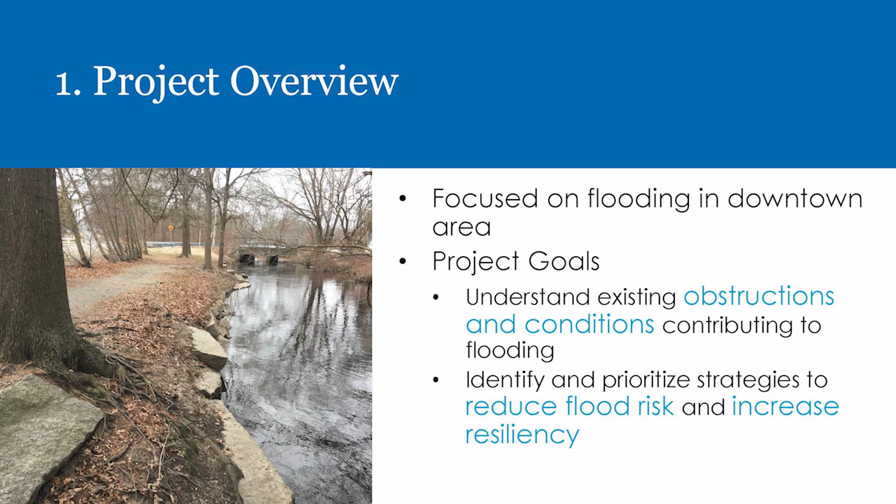Just to start with the project overview — Nick covered this for the most part, but to reiterate our project goals: we wanted to understand the existing conditions of the river, why we're seeing flooding in the places that we are, what the potential causes of that are, and where the key points along the river in this area are to really focus on. Then identify and prioritize strategies that can reduce flood risk into the future and increase that resiliency.

So to start it all off, we need to understand what a floodplain is. The natural river process involves the river channel, which you can see on the left there in blue, and something called a floodplain on either side of that. During normal base flow conditions — dry, sunny days — you have a river with water flowing through it, and it stays within its channel.

As it starts to rain, if we have smaller rain events and the whole drainage area — the watershed — is contributing flow into the river, the water starts to rise. Up to a certain point, it's still going to stay in that channel. But when we get those really big events, in natural conditions the water floods over into a vegetated floodplain. The trees and plants growing there help to slow the water and absorb some of the sediment that might be in it — it's just part of this natural system.

Well, what happens is that people need to live somewhere — we need our work and our businesses and whatnot — and over time, humans move into that floodplain because, again, during normal sunny days it's dry. It seems like a great place. It's fertile soils, all of that.

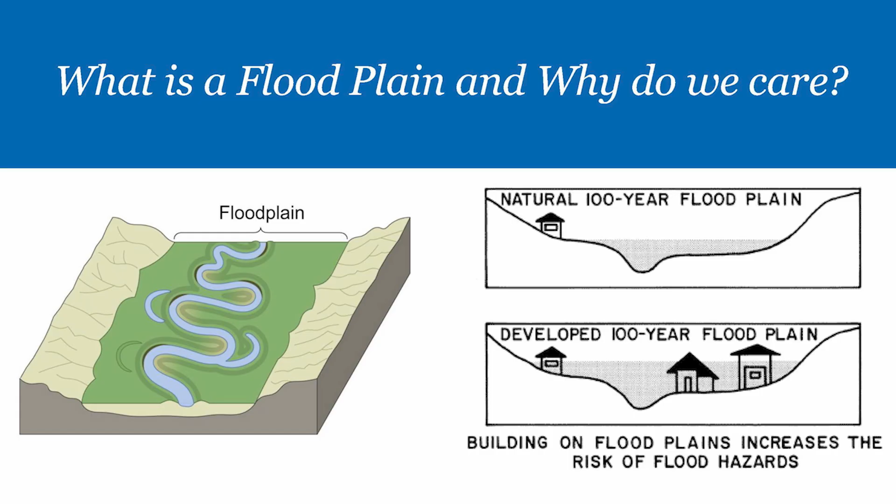But by building in that floodplain, that made those businesses and homes susceptible to flooding. So humans, being humans, we like to try to control things, particularly nature. We tried to build things up, thinking we're going to stop the floodwaters. So you might see walls along the river channel trying to block the flows, or in other cases slow the flows. Over time we end up with a very impacted, urbanized river system, and that can lead to disastrous floods in the floodplains, as we've seen on the news in a variety of places.

Unfortunately it's getting worse and worse as the climate is changing and our storms are coming more intense and more frequently. So that's kind of the background on what we're talking about today when we think about floodplains and flood zones.

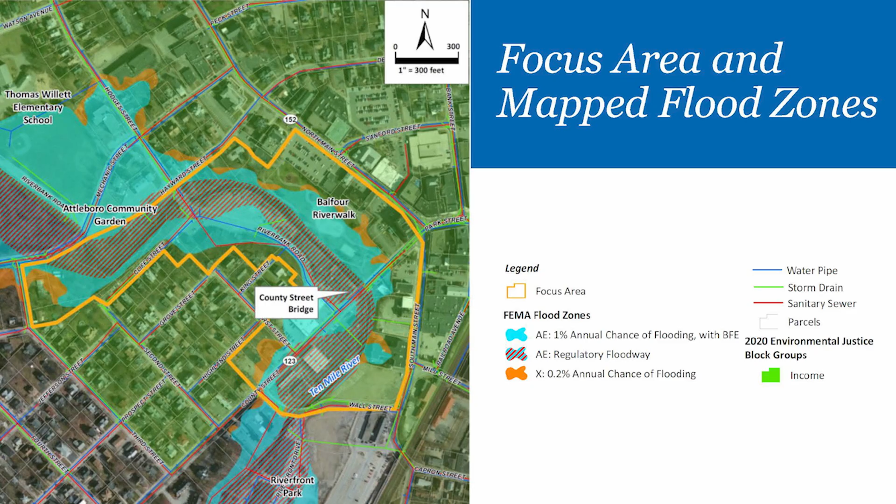And as we've been seeing, that is happening more and more frequently. So we're going to try to refer to it as the 1% chance event to help drive that home, but it's the same thing as what other people would call the 100-year flood event.

So we're really focused on looking at impacts at the County Street Bridge. We know from talking to all of you and looking at our model results, this is a critical point for the city. It's a very important arterial road, and that is where we've experienced a lot of the flooding in recent years. So that has really been where we've focused our efforts.

The project overview for this particular study involved 8 different tasks. At the last meeting we were really focused back on tasks 3 and 4. Since then, that was in May, we have done a lot of technical modeling work and looked at what strategies and measures might help reduce those impacts. So I've highlighted tasks 5 and 6 there.

The next steps after this meeting are that we go into a benefit cost analysis. That's not just a general benefit cost analysis - this is something specific that FEMA requires as part of this grant. Then we develop the flood mitigation and resilience plan that can be guidelines to help the city moving forward. Nothing's going to be built tomorrow, as Nick pointed out - this is just looking at the opportunities and strategies available to the city.

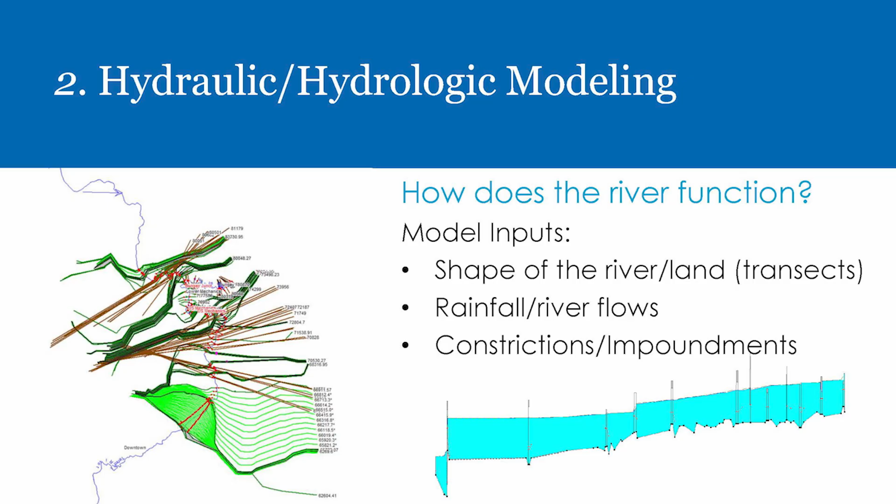What you're seeing there is the river channel through the city, and then all these crazy lines that look like some sort of creature - those are transects.

So that is just how the model knows the shape of the land. If you drew a line, a magic line through down County Street by the river and across, this would show the elevation at each point along that line. We need lots of those transects to understand the shape of the land and how water would flow if it leaves the banks of the river throughout the downtown area.

Some of these were existing that FEMA had in their model. Some of them we went out and surveyed ourselves. We used a lot of different sources for this.

We're looking at rainfall amounts and river flows. There are river gauges at different points in the Ten Mile River that the USGS is measuring flows. We're looking at that, and we're looking at the water department's data on flows. And then we're also looking at constrictions and impoundments.

Having a good understanding of where the pinch points are in the river and where things are backing the water up or impounding it, which could create a whole pond, or in some cases you wouldn't even know it's being impounded behind a structure.

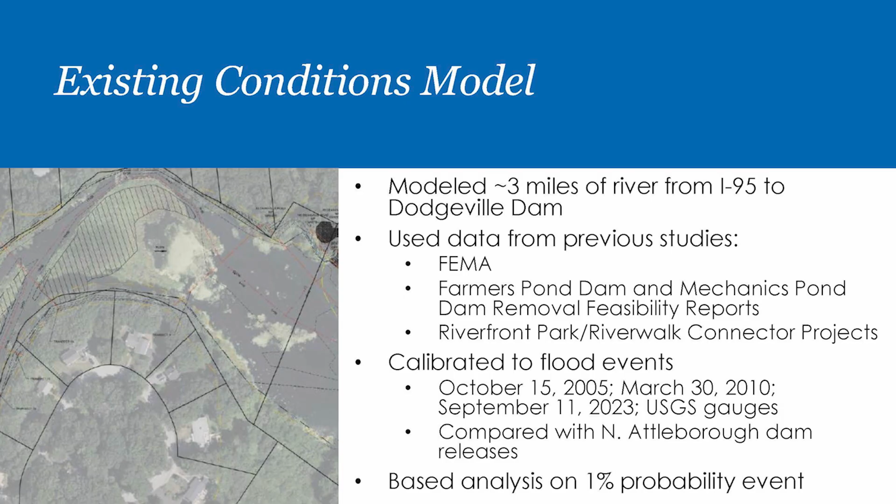And we also thought about the North Attleborough issues. We know that they're obviously upstream from this area, and there are dams up there, and they do sometimes release flows. So we're able to think about when they release flows, how does it compare to the event that we're using for this study? Those releases would be less than what we focused on as our flows. We're looking at that 1% probability event - the really big events that those storms represented, or the 100-year floods.

So the project study point is County Street. I already touched on this a little bit, but just wanted to bring that home - that is a critical arterial road for the city, and of course the businesses around it, but also people trying to get from place to place, emergency vehicles during an emergency flood event. We want to be able to keep this open if possible.

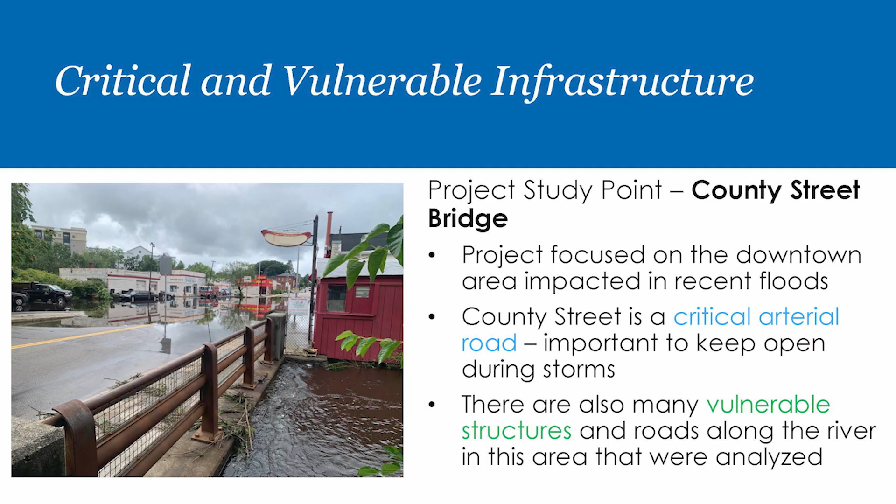But there are many other vulnerable structures and roads along the river that are incorporated into the model. What we're looking for are the most impactful strategies for this particular point. That doesn't mean that some of the other constrictions that we'll present wouldn't be important for localized flooding, but really this study is focused on that point.

So just to go through some of the existing constrictions or bridges that we have in the study area - you can see, I'm sure you're familiar with all of these areas, but Water Street Bridge at the upstream end. This pedestrian bridge, just to clarify, is the Sterling Lofts area. There's a pedestrian bridge there that is not for vehicles to drive across, but that's what that constriction is. There's the Mechanic Street Bridge, County Street Bridge, Wall Street Bridge.

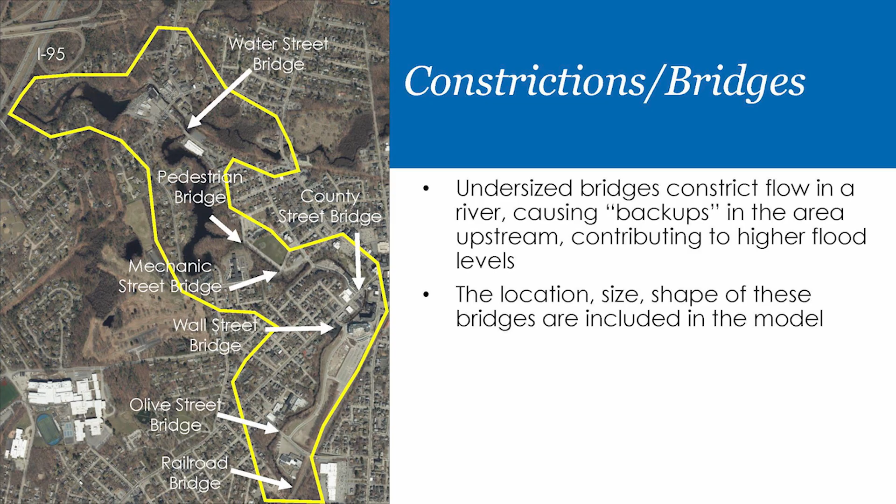We'll get into a little bit more on this, and I think we have boards up as well for each of these.

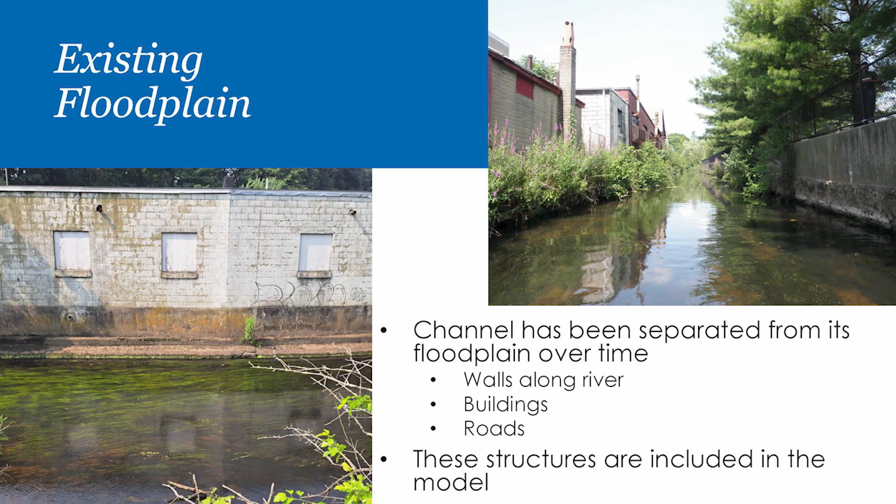And then there's the existing floodplain, just as a reminder, kind of talked about that earlier. We know what a natural floodplain wants to look like, and the existing floodplain has been changed over more than 100 years. The channel has been separated from its floodplain. We've got walls along the river, buildings, and roads. Those structures and the shape of that area are included in the model.

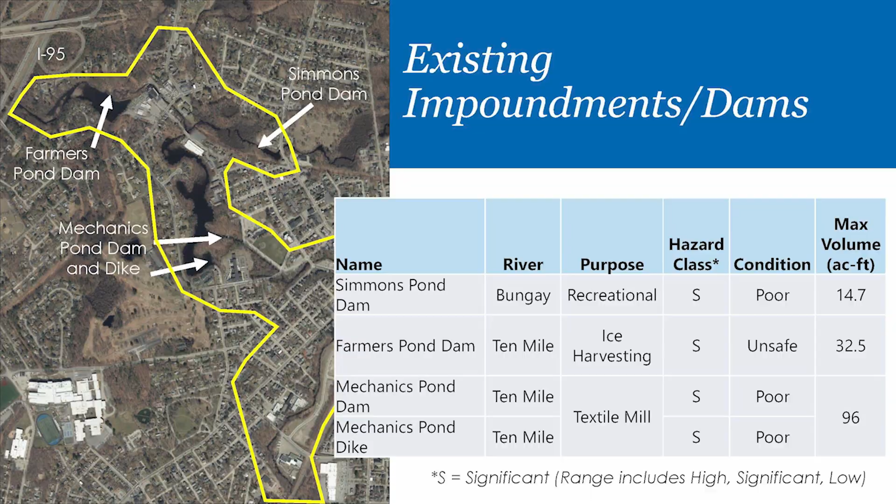We also have existing impoundments caused by dams. We've got Simmons Pond Dam, Farmers Pond Dam, and Mechanics Pond, which actually has two structures, a dam and a dike. To give you a sense of the purposes of these dams originally, Simmons Pond Dam, as far as we know, was created for recreational purposes. We don't have any documentation that it was for industry or anything like that. Farmers Pond Dam originally was created for ice harvesting, and now is mostly recreational for those that live around it. Mechanics Pond was definitely created to help support a textile mill in that area, actually where Sterling Lofts is today. So those were the original purposes for the dams.

The Office of Dam Safety determines a hazard class for dams, and all of these are considered significant hazard dams, meaning that if something happened to them, they could cause significant damage and threat to safety downstream. The condition is determined by various inspections that have to be done on the dams, and our best account of recent condition is that most of these are in poor condition, and Farmers Pond recently was determined to be unsafe or in unsatisfactory condition.

The max volume being held back by these dams is given in acre feet, which isn't maybe the most helpful measure, but you can see that Simmons Pond has a really small impoundment behind it. Farmers Pond is a little different, a bit bigger, more than twice the size of Simmons, and then Mechanics is quite large at almost 100 acre feet of storage water being held behind the dam.

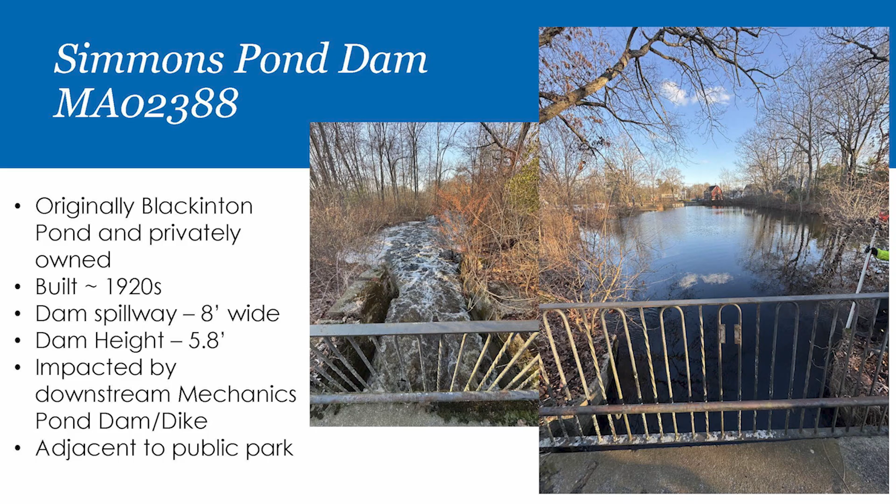All right, a little bit more on each one. Simmons Pond was originally Blackinton Pond and was privately owned. It is now city-owned, built somewhere in the 1920s — I couldn't find an exact date, but it was in that time frame. The dam spillway is pretty small, only 8 feet wide, and the dam height is holding back water about 6 feet high. It's actually impacted by the downstream Mechanics Pond, so when Mechanics Pond is holding back a lot of water, it comes up and impacts the effect of Simmons Pond Dam. It's adjacent to a public park, so people do go and can sit — I think there are picnic tables and benches and that sort of thing at the dam.

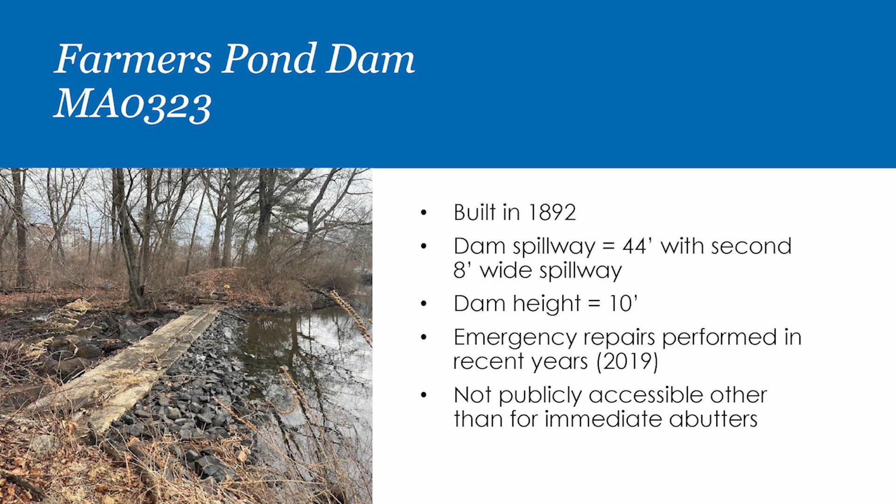Farmers Pond Dam, built in 1892, has a 44-foot spillway, and then a second spillway that's about 8 feet. Its dam height is 10 feet high. It has needed some emergency repairs in recent years — in 2019 it had some problems where it was threatening to fail, and they went in and did emergency repairs there. There's no public access other than for immediate abutters, as far as I could tell.

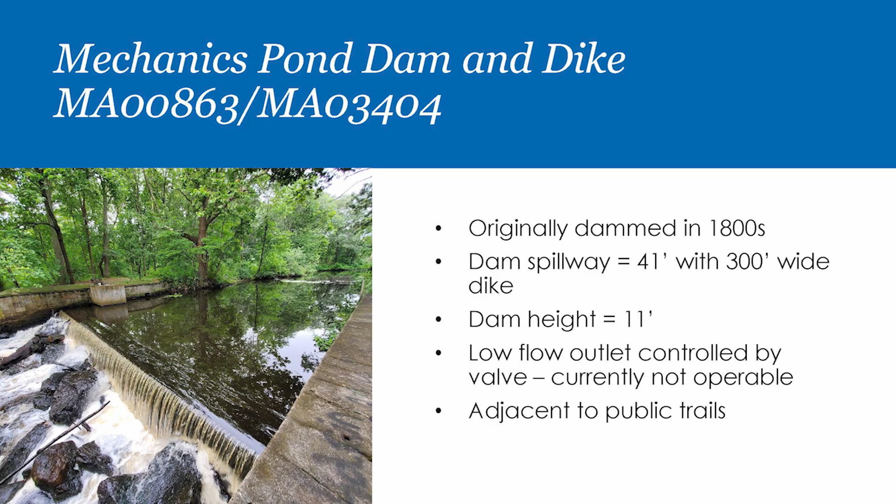And then Mechanics Pond — this was originally dammed in the 1800s. The spillway is 41 feet, and the separate dike is an earthen berm or dike that is 300 feet wide. It has a dam height of 11 feet. It does have a low flow outlet controlled by a valve, but as far as we know, it is not operable at this time, and it is adjacent to public trails.

And then one more thing on the existing conditions of the river system is the sediment. There is some sediment buildup in different places. Sediment buildup, also called sedimentation, can impact habitat in the channel, and it can also reduce channel volumes.

Sedimentation is impacted by sediment sources. So where is all this coming from? Is it coming from the channel itself, or is there some man-made impact that's sending sediment into the river? There's also sediment size—think the difference between a piece of gravel, which is considered sediment, and really fine material like silt or clay, and how that moves through a river system makes a difference in the type of sediment buildup that you see.

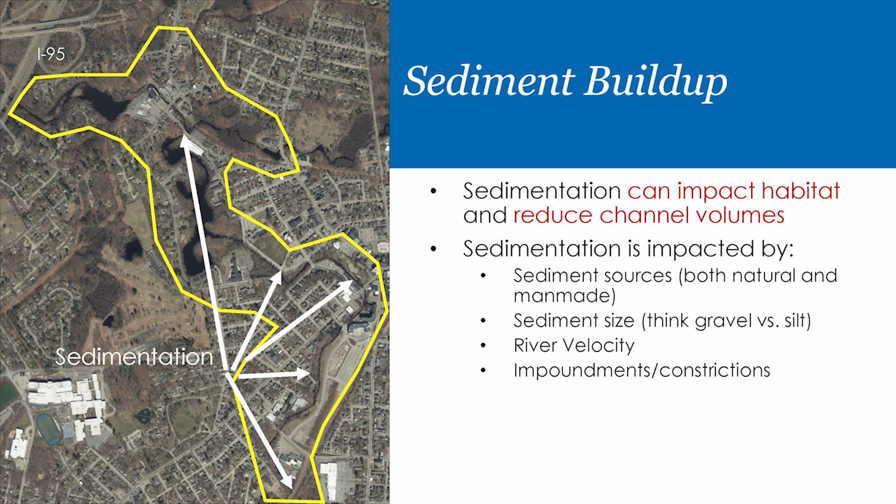River velocity is really important. Where you have a fast-moving river stretch, you're not going to have a lot of sediment buildup. And river velocity is impacted by impoundments or constrictions, so they go kind of hand in hand to where we see sediment buildup.

So with that, I'm going to hand it to Jonas to talk a little bit about what strategies we evaluated.

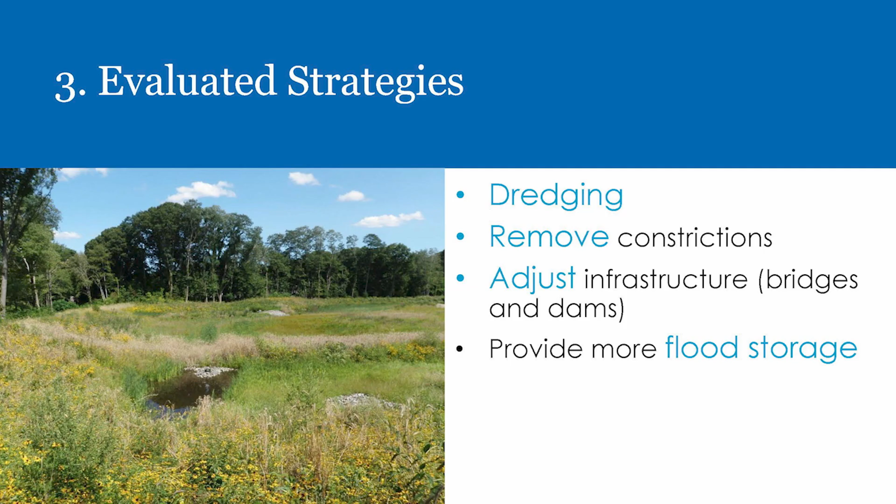Thanks, Michelle. So as part of this project, we were looking to identify all the different possible points along the river that might be causing flooding, causing impoundments, causing the water to build up, and then identifying different individual solutions that we could bring forward and develop as a scenario to reduce flooding along the river, and also see how they worked together, how they interacted with each other to potentially bring about the most reduction in flooding with the best combination of scenarios along the river.

So that included dredging along the river, removal of sediment by machines, removing constrictions—so that could be widening bridges, adjusting infrastructure, widening or raising bridges—as well as removing dams potentially, and any sort of scenario that might provide more flood storage.

So in some cases, widening the banks, especially where maybe a wall has been installed along the river, which is actually blocking the river's access to the floodplain. Is there an opportunity to allow the river to access that floodplain easier, potentially lower the wall, get into the floodplain? So I'll talk a little bit more about each of those.

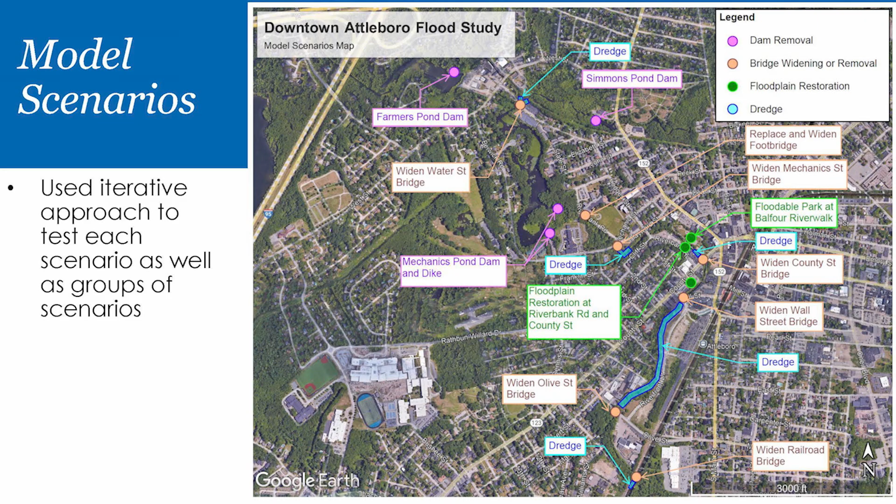And here is a map, and we also have this as a board in the back that we can look at more later if anyone's curious about any of these individual scenarios. We looked at over 10 different scenarios that could help restore the natural river functions and also improve flooding along the river, reduce flooding. So we were looking at each of these scenarios one by one, and then we tried to combine different scenarios to see which could get the most benefit.

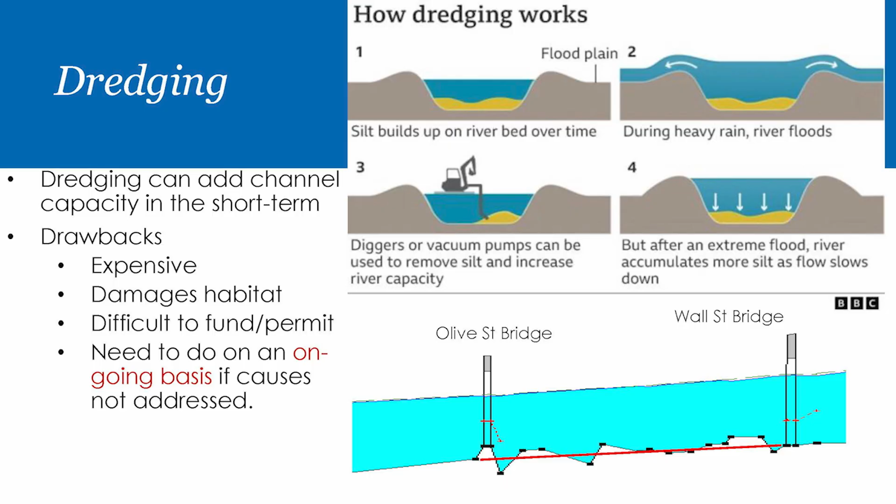In that situation where you have that imaginary line representing a constant slope, I see areas where you could slow water down, creating void volume capacity where it stands out, so you would dredge those areas. Where there's water capacity below the line, would that be filled to create a smooth bottom, or would it remain? That's a good question. Those would probably be allowed to remain as natural lower points, maybe from structures in the river or deeper pockets, especially where a river bends, it tends to get deeper in that area. So you wouldn't be filling in areas, you'd just be removing sediment. Thank you.

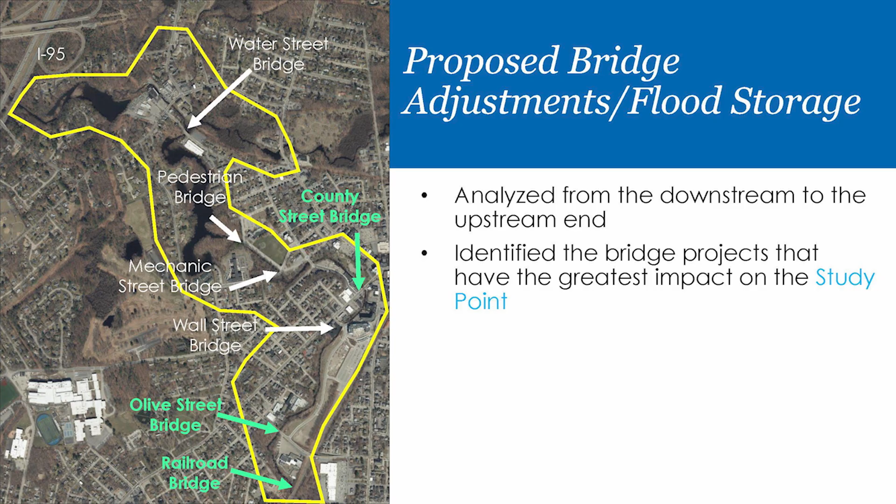So next up, we'll look closer at the bridge adjustment scenarios. We looked starting from the downstream end of the river, working upstream, because typically you get the most benefit upstream from a downstream project. If you free up a pinch point downstream, everything upstream will have a greater ability to flow through it. We looked at each bridge individually, identified certain bridges with the most benefit, and found some that worked considerably better when paired together.

Starting with the railroad bridge, the downstream end of our project area: the existing bridge is a 26-foot wide stone arch bridge. The bankful width, the natural width we estimate the river to be without human interference when not flowing into floodplains, we think would be 45 feet. So this bridge is almost 20 feet narrower than it would naturally be.

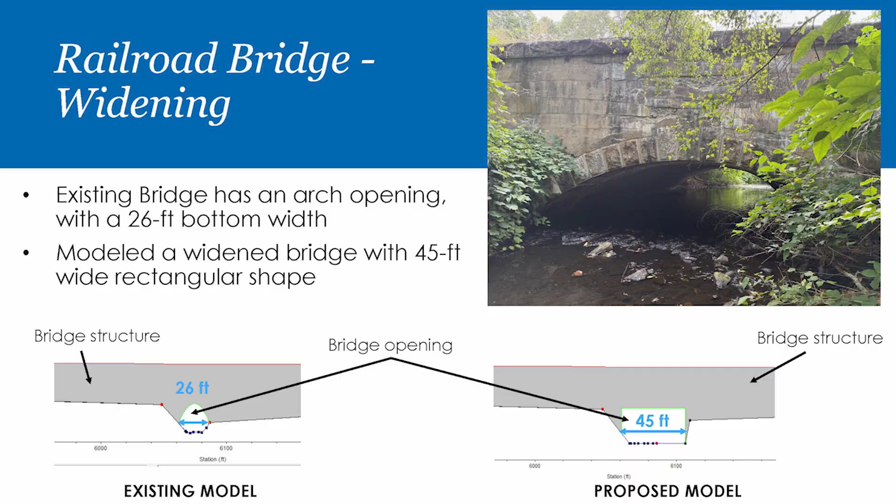So we modeled it having access to a 45-foot wide rectangular bridge. In the model, this shows widening it from 26 feet to this blocky 45-foot wide opening, freeing up space for flow. As a result, velocity in the river picks up because flow can now pass through, and impoundment is reduced. We also modeled sediment transport occurring, with the same results you'd see from dredging also simulated and expected when restoring natural river functions. Restoring the river's natural processes keeps sediment moving, like a natural river system continues to carry sediment along.

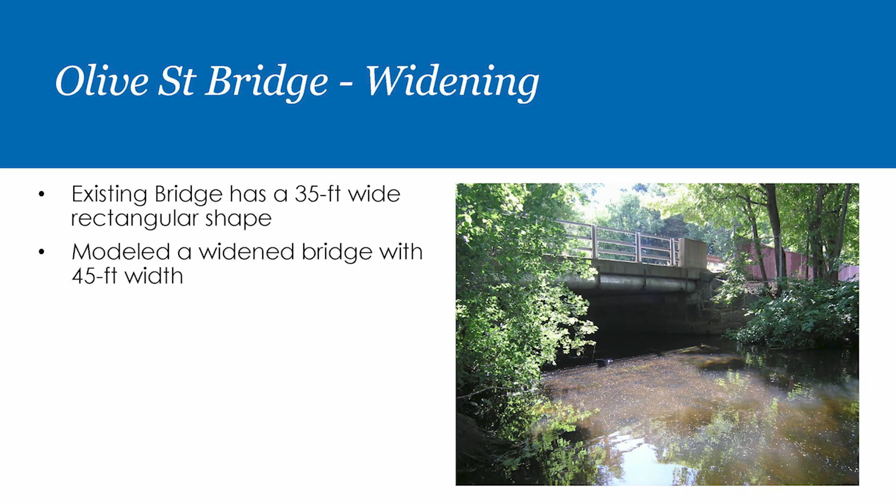The next upstream bridge we found considerable benefit at was Olive Street Bridge, immediately upstream. Again, a natural estimate of river width here would be 45 feet, and the existing bridge is about 10 feet too small. Olive Street and the Railroad Bridge are so close to each other that they interact, impounding water together. So increasing the size of one without the other just shifts the impoundment into the other bridge. We found these bridges work together, giving the most benefit when widening both as part of a larger project.

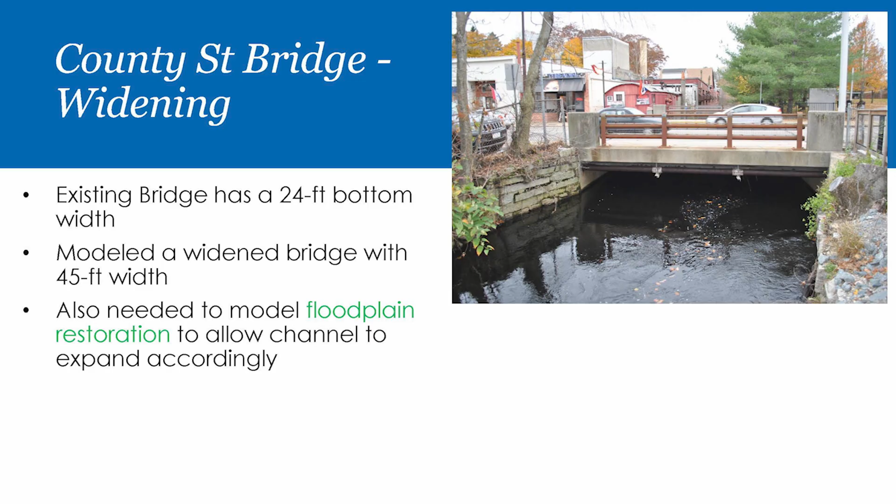The last bridge we identified as having significant benefit, not only for the downtown area but for our specific study point at County Street, is the County Street Bridge itself, which is more than 20 feet narrower than the natural system would be. Upstream of County Street, retaining walls that keep the river in a channel continue to pinch it, so floodplain restoration upstream of County Street Bridge was also included in our scenario. This was the general area we included in our County Street restoration scenario.

Unfortunately, Riverbank Road upstream of County Street is on the low side, whereas the Balfour Riverwalk is a bit higher. So the first place water flows when a flood occurs and County Street backs up is the Riverbank roadside, where there's already buildings and the roadway.

So we looked in our scenario at lowering the wall on the Balfour Riverwalk side, making a floodable park - a park that most of the time is totally above water. People are able to play in it, and then in the rare flood event, maybe once a year or once every 2 years, water is able to flow into the park. It doesn't damage the park, it would be built in a way that it stays in place and is stable, but it creates this new flood storage capacity. It's almost like a release valve before water can even get to the Riverbank Road area. This created another large benefit for the County Street artery specifically.

Got a question for you. You're going to make that a floodable park - are you going to lower the park then? Because that park is right now 2.5 feet above the water line, or even above Riverbank Road. So you're suggesting lowering the park?

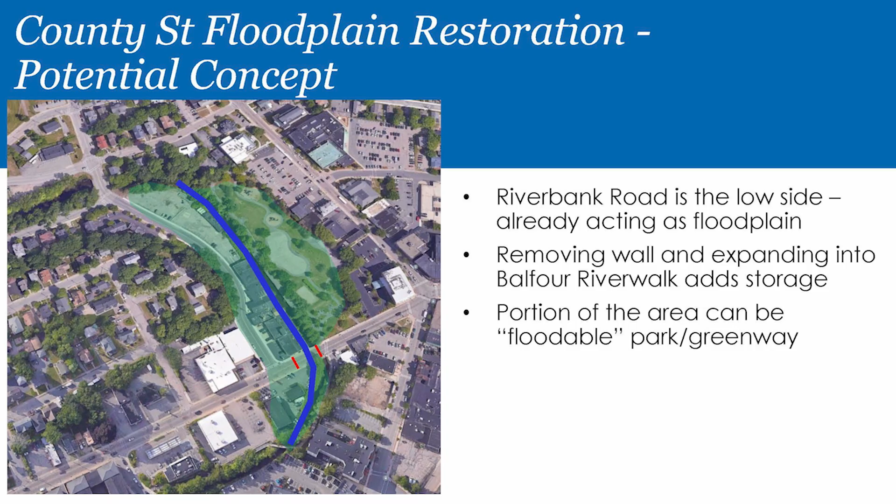Okay, yeah, right there. There are houses on the Hayward Street side that flood now, they're in the floodplain. I own a house further up, not on the floodplain, but my house flooded in 2010. I watched the grates going up and down on the street with the water.

What is that widening going to do to those backyards now? Are they going to get more flooding? Well, the hope by creating more flood storage downstream is that it lowers the water elevation in this whole area. It creates flood storage, so rather than rising up because of these narrow channels, it can expand out. That would lower the water levels, especially upstream of this point, and hopefully prevent that flooding.

That's a very good question. The hope with a lot of these restoration scenarios is that opening up the bridges is not going to cause more water to flow through. It's freeing up a pinch point that's raising water levels. At a certain point, the bridges raise water levels high enough that the weight of the water pushes it through enough that it increases the flow under the bridge to the same flow it needs to achieve anyway. So the flow coming into the river is the same that leaves the river all the time. Flow in equals flow out. You're not getting more flow, it's just increasing going downstream.

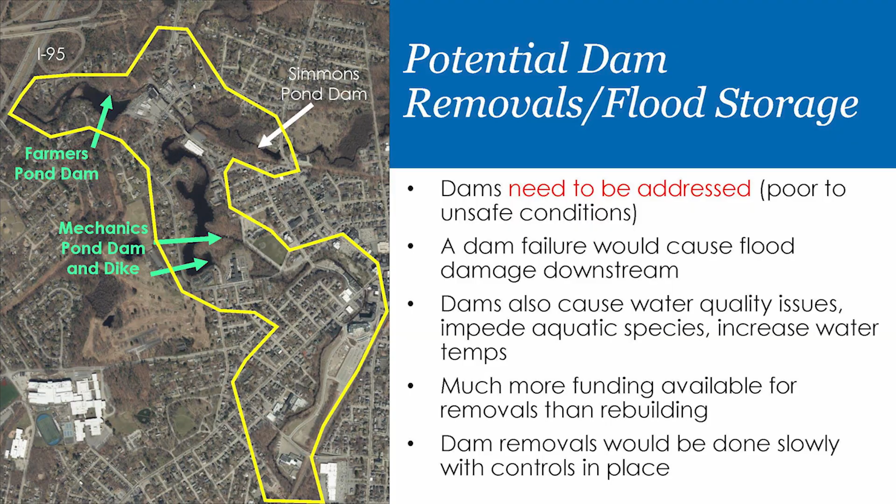Dam failure, if it occurred, would cause not just your typical 100-year or 1% flood coming downstream, but the entire impoundment, those vast acre footages Michelle ran through earlier, all rushing downstream at once. All of these dams being rated as significant hazard dams could involve potential loss of life. So dam removal was a scenario we looked at, not only for potential benefits to everyday flooding, but also preventing a disastrous flood that could come downstream.

Dams themselves cause water quality issues. They trap contaminated sediments or sediments in general, and they heat up water. They slow down the water, so it becomes almost like a parking lot, absorbing the heat of the sun. That reduces water quality in the river and impedes fish passage upstream. So dams worsen water quality on their own.

There is plentiful funding from the state for dam removal, much more so than for a dredging project or rebuilding a dam. There's a lot of funding available for removal, but only a few grants go out every year for rebuilding a dam.

Dam removals occur very slowly. It's not like the failure scenario, it's a very intentional, slow removal of a few inches or a foot at a time to prevent a rush of water downstream. Since 2005, there have been about 40 dam removals in the state, and the rate is accelerating across the state. This restoration strategy is picking up speed and gaining a lot of acceptance.

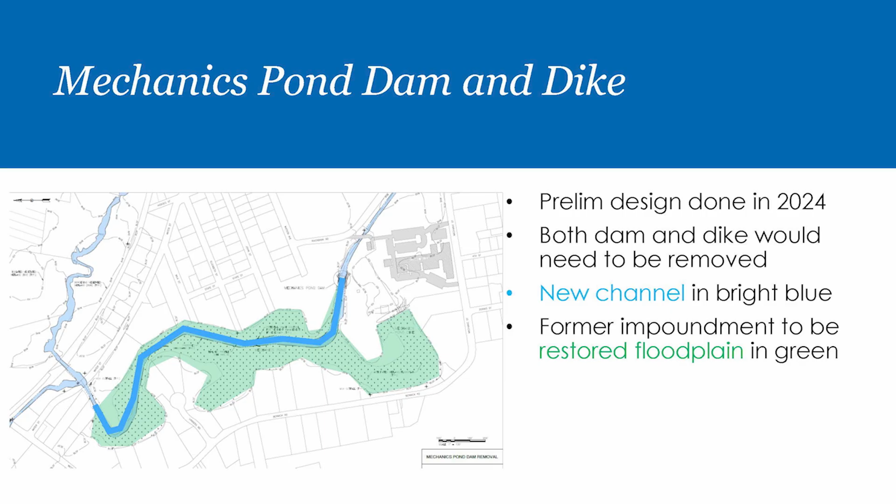So that gives you the sense. I guess we'll be lowering that water surface. It would be easier to picture with landmarks instead of just green in the river. That little projection into the green area, that's above it, so lower is lower, and that subdivision is higher. People are all living up higher, it drops down to the pond currently, then it would drop even further with a floodplain and the channel below. So all of that would be lower.

But I agree with you. Yes, we should have an area on the back of that, which you'll see magically with the next one.

What we did is we took the preliminary design that was done before on separate projects, and showed it here. So that's why they look different.

So here's the preliminary study for Farmers Pond Dam that we performed this spring. Our restoration scenario involved removal of the main portion of the dam as well as the auxiliary spillway to the side.

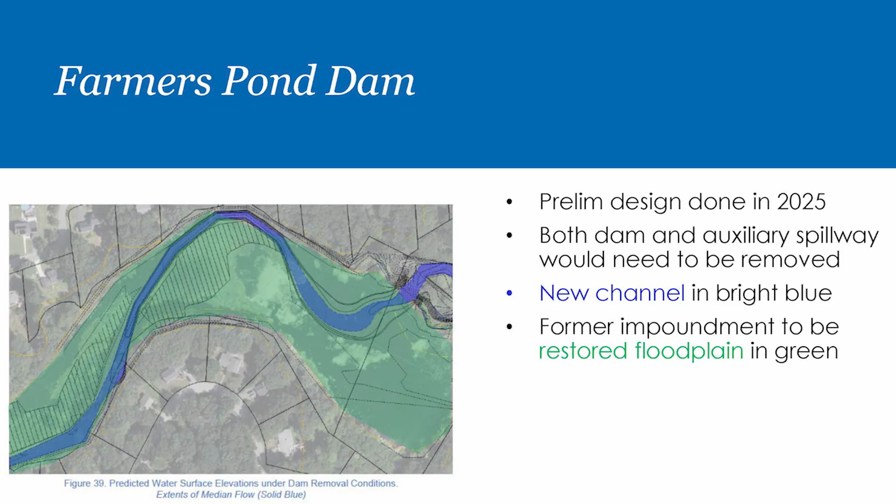Higher up are the residential areas. This green area right now is entirely ponded. Removal of the dam would reduce that ponded area to just this blue ribbon of the river.

All of this green area, some of which already looks somewhat vegetated because water levels are fairly low above the sediment, would largely revegetate and become wetland. The residential areas would remain higher up and farther from the water, although they're relatively high up right now.

I did want to run through this case study. The Keyes Parker dam removal along Sucker Brook in Pepperell was a project Horsley Witten was involved with between 2019 and 2021. In 2021, over about a 2-hour period, the dam was safely and quickly removed, and the restoration process followed.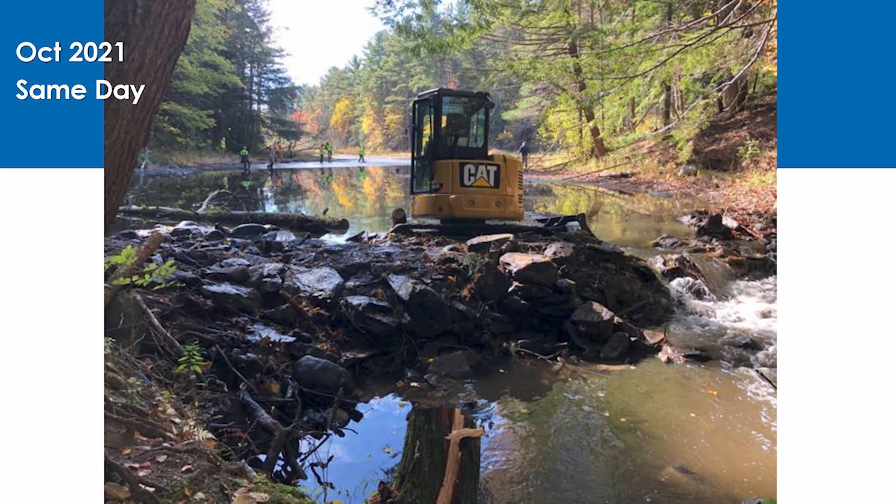As removal started, it was opened up toward the right side of this picture. You can already see some bank popping out, and you can almost see a curve forming. This was within less than an hour.

That same day, with the dam removed, you can see the sinuous river reemerging. Same day, it's already moving sediment and becoming a narrower channel.

Within 2 weeks of removal, some sediment transport has occurred, and you see banks reemerging and floodplain that would be filled during a major flood event.

Over time that keeps deepening, at 3 weeks, 6 weeks, to 6 months. The bottom of the river has changed too, looking much more sandy, less like silty deposits. This could have been the natural river bottom reemerging.

Then at 7 months you start to see some green little sprouts popping up. At 6 months it was just April, the very beginning of the growing season, so you would have seen green earlier, but it was an open winter. It didn't take 6 months for vegetation to reemerge; that was just the time period.

This removal happened the last week of October, so there wasn't much opportunity for regrowth. About 1 month into the growing season, green was sprouting up, and within one more month, you see a nice bed of vegetation.

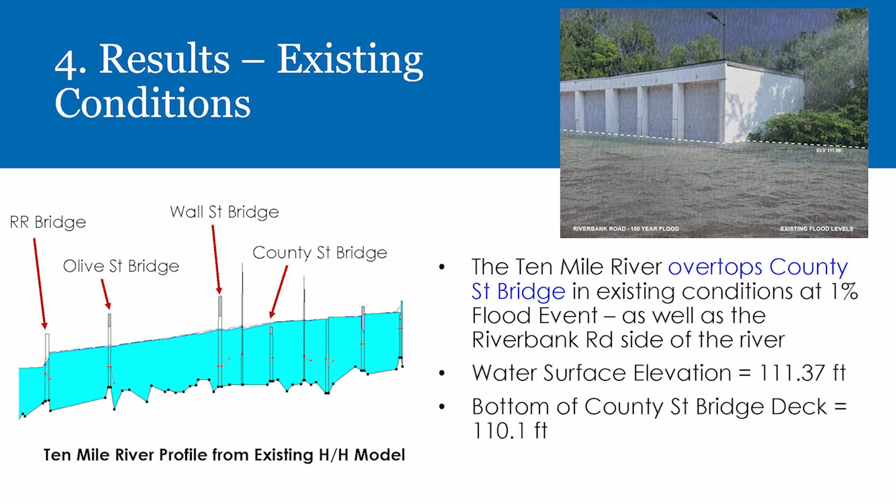So, some numbers related to that. That water surface, 111.37, the bottom of that deck, so the bottom part of the bridge, if you were going under the bridge, it'd be your ceiling or your roof. That's 110.1 feet. If the bridge were being built from scratch, designed from scratch, often you would design with a goal of having 1 foot of space below that bottom of the deck, so that even during the 1% event, there'd be a foot of air as a safety factor that wouldn't be flooding the bridge. That was one of the guidance points we kept in mind as we evaluated what scenarios would be the most successful. How could we achieve the design that you would do if you were making County Street Bridge from scratch today?

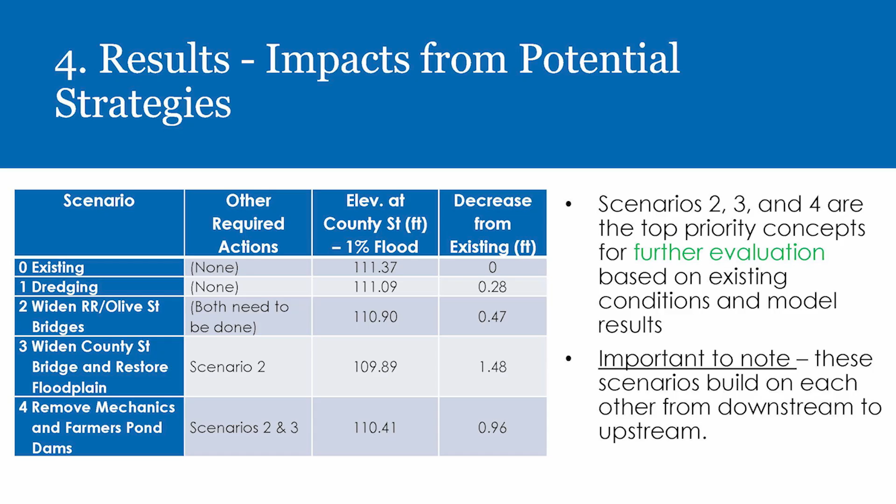So we wanted to include dam removal as a scenario, taken together with removing Mechanics Pond, removing Farmers Pond Dam, and widening these bridges, and building the projects from downstream to upstream to get maximum benefit from these, removing the constrictions, and then coming from above and removing the risk from dam failure, is what we found to be our recommended top priority projects.

Pass it to Nick, unless we want to. Yeah.

For the bridges or the structures, I guess inspected kind of recently, are they in good shape, especially if being like, if they were overtopped kind of recently? And then widening the bridges, that means like completely replacing, right?

Right, so widening a bridge would involve probably a full replacement. I don't know in terms of the recency that any of the bridge inspections occurred. I'll definitely note that widening could occur opportunistically, so as the bridges age and a replacement is planned, that would be probably your ideal time to widen them, or prioritize if the railroad bridge and the Olive Street bridge have the same priority level, but Olive Street has a sooner timeline for when a replacement would happen. That's an opportunistic time to also say, let's get in there and make sure we have the new design be as wide as it needs to be.

All of those bridges we looked at were constrictions, and we are calling out the most impactful scenarios to work together. But if you're replacing Mechanic Street Bridge or doing the road work there, it should absolutely be widened at the same time if possible, because each step incrementally can help reverse what we've done over the past more than 100 years. So they are constrictions. We were just focused on those top impactful ones.

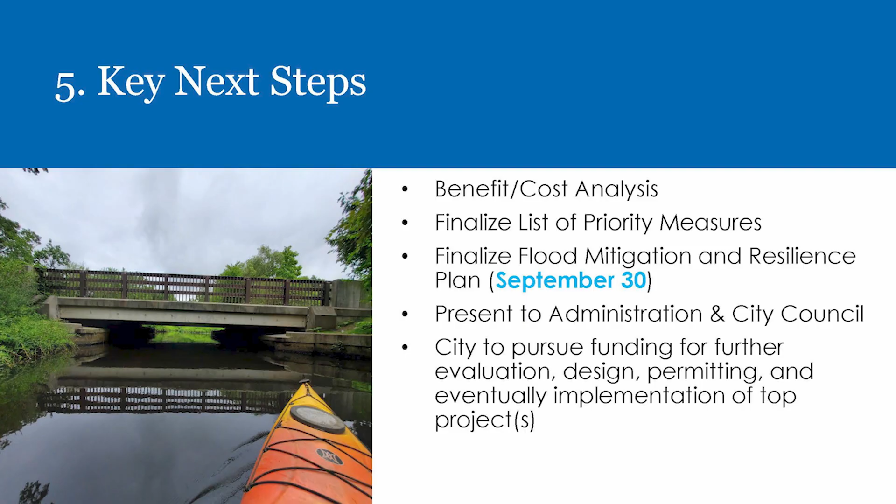Once we have that flood mitigation and resilience plan provided to the planning department, we will be presenting that to the mayor and city council, giving them a good comprehensive summary of all the potential scenarios, what that's looking like for permitting timelines and further design, and then, as best as we can, trying to give a potential estimated construction timeline.

But something to really keep in mind, as we've been saying already, a lot of these are long-term goals and actions. So unfortunately, none of these are going to be done by, say, next year or even the year after. There's a lot more work to go through to get these to the next step.

But in addition to the goals of this project and some of these scenarios, we are working on a smaller scale with a couple of other projects. Most notably, around the downtown area, we're working on our green stormwater infrastructure project, trying to look at our existing stormwater system to see where we can improve it, not only from a flooding standpoint, but from a water quality standpoint.

So trying to take the water out of those pipes and infiltrate it closer to where it's falling to the ground, trying to reduce the volume of water getting into the Ten Mile River during any of these storm events. We are pursuing those in the short term. That project will be wrapping up this year as well, so we'll have that feasibility plan and report that'll also be presented to the mayor and city council, and again, we'll be pursuing further grant funding for the implementation of that.